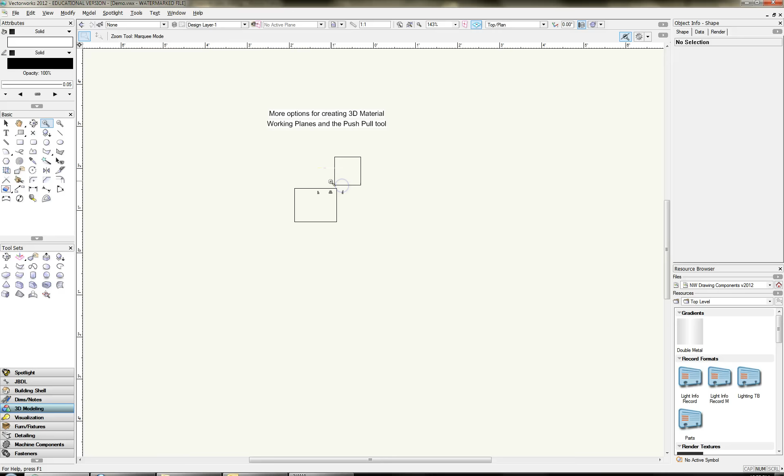But now, back in 2012, they invented something called the working plane, and I'm going to show you that. Sometimes it's better to extrude, other times the working plane might be useful. So we have our square here, but I'm going to go up to right isometric, and here's our square, and it's actually a big rectangle.

So what I'm going to do is, let's say I want to have a circle, a tube going across from this side to that side. Well, if I drew a circle here, it's drawn on the screen plane. You can see up here it's drawn on the screen plane. So if I extruded it, it would go straight ahead, and it wouldn't have any bearing with this side right here, and it wouldn't go that way.

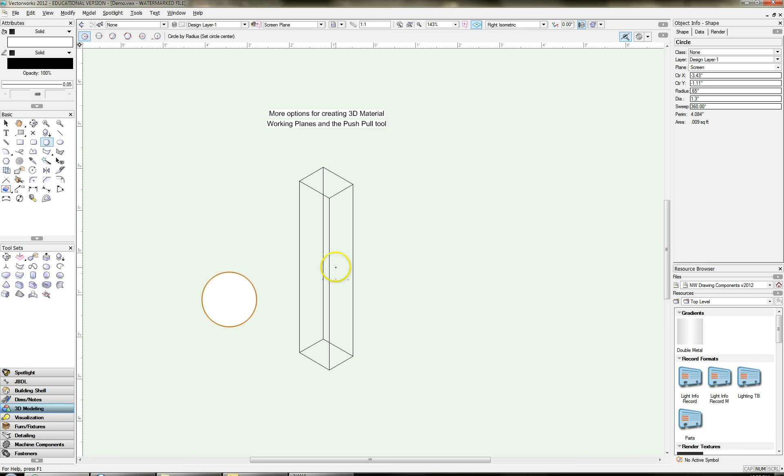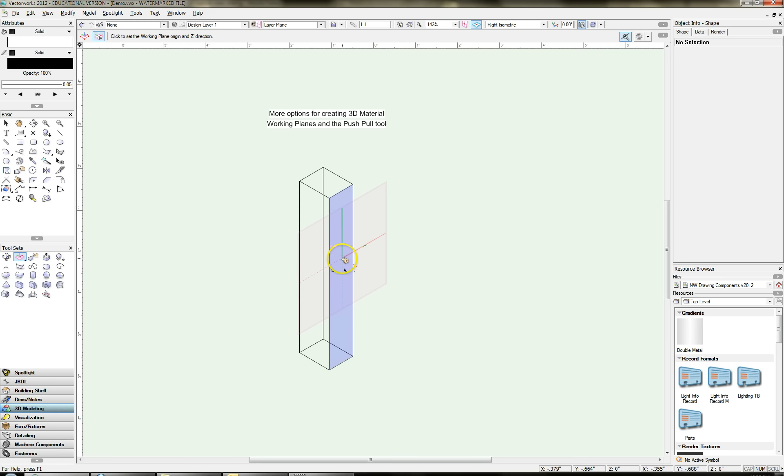So what we're going to do is come down here to this tool set, which is actually in the 3D modeling tool set. Right here is set working plane. Now you see how I'm dragging this little plane around, and when I get close to the object it wants to go on this side or the top, but we want our working plane to go right here. So I'm going to click, and now I'm going to come up here and make sure we are on working plane. Now you see how it kind of changes things.

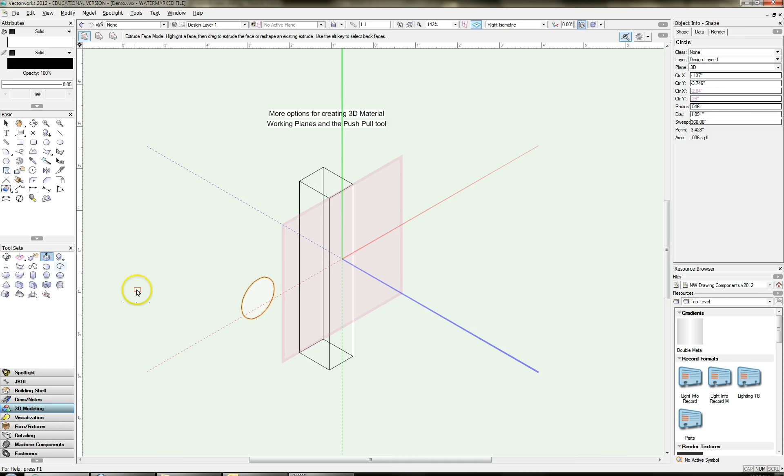Now when I draw that circle, I'm going to draw it out here. You see how it's drawing it, and it looks like it lines up better with that image. So now I have this circle here, and what I'm going to do is use the push-pull tool. That is this guy right here, push-pull. You can see when I get over it, I highlight it, and I click, and I don't let go, and I let go, and I click the third time. It's a three-click way to work. So here I made this cylinder.

Another way: let's say I have push-pull, and I want to make this box, which is 5 inches tall, into 6 inches. I can come up on the top here, and I can make that 1 inch, and if I did a measurement, I'm betting this would be, well, it's not snapping for some reason, so it should be about 6 inches. Yeah, look at that, 6 inches. So that is another way to do extruding.

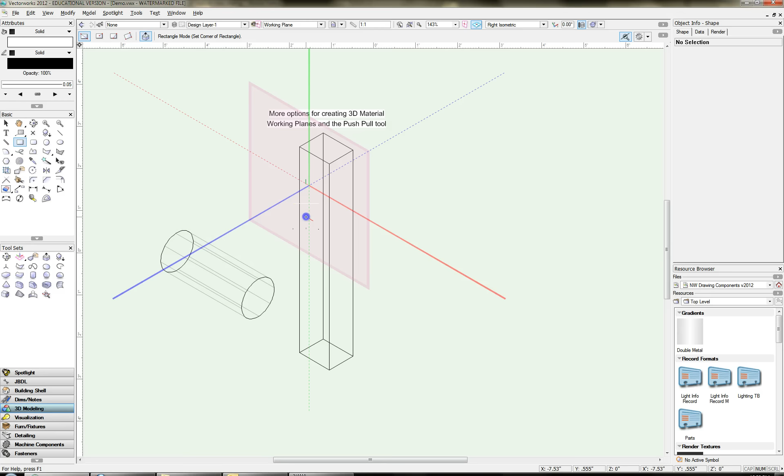Now the working plane is on this side. Let's try and move the working plane to the front. Get the working plane, and we'll stick it right there. Now we're back on the working plane again. If I want to put another rectangle through, I can push-pull it through like that, click, and if I wanted to, I could push-pull it out a little bit, or push-pull it up a little bit.

So there's a lot of things you can do with working planes and push-pull. Now when we want to go back to the screen plane, we come back and click, make sure we're on screen plane. Now watch, now if I draw now we're out of that. If I draw a cube, it won't be on those angles. It's going to be straight on because we're back in the screen plane again.

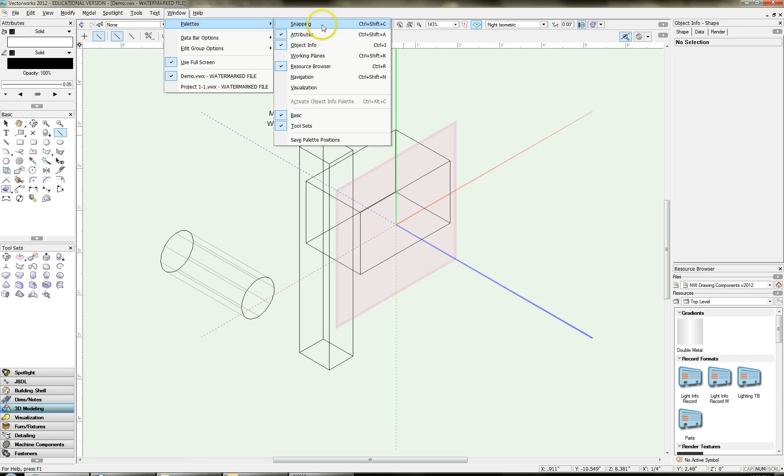Let's see if I can do one more thing here. I'm going to get the working plane back, and put it right here. I'm going to set up the working plane again. I'm going to draw a line from, let's come back here. I'm going to come back quick to my palettes for snapping. Oh, and it probably doesn't allow me to do that, let's try window, palettes.

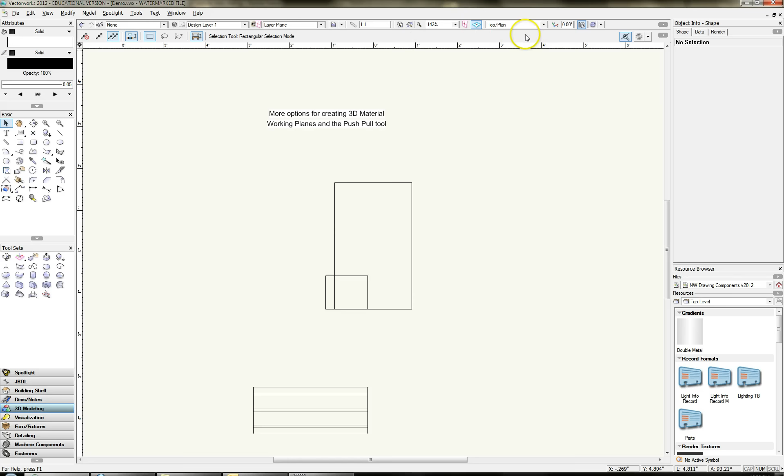It's not liking me. Oh, because I have a window palette open. For some reason it's not liking me changing that. What I was going to show you, I can show in another video.

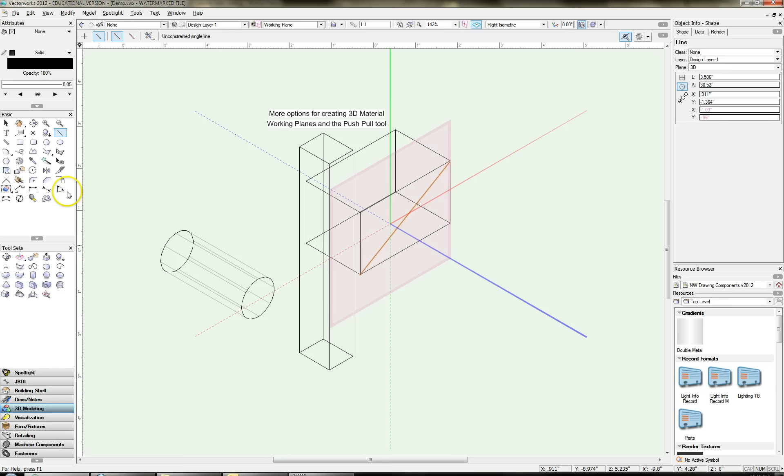Let's come back to right isometric. If I drew a line, let's get the working plane back. Okay, if I could, now it's not going to allow me to snap, but if I could draw from here, this line to right up there. Now, if I could snap, I wanted to split this, let's try the push-pull tool again, and it's not allowing me. I should be able to - this line should cut this, and I should only be able to push or pull a triangle. But I will work on that, and I'll show you that in a different video.

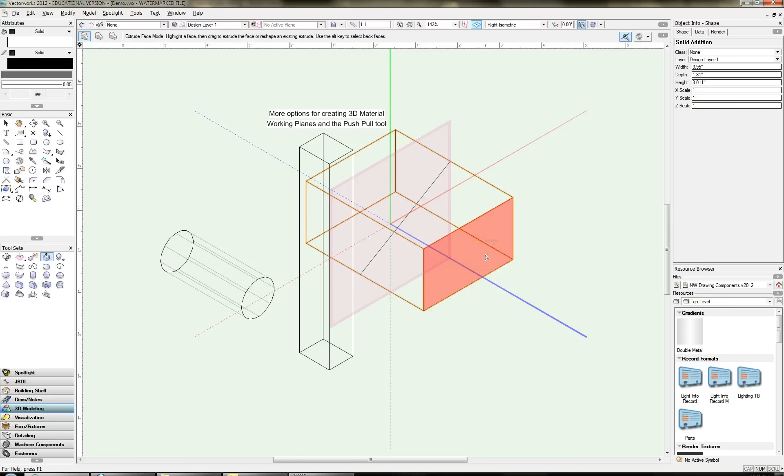But essentially, hopefully you can see here how in certain circumstances the push-pull tool can be fairly useful, along with working planes. So with that, I am going to let you go, and happy drafting.